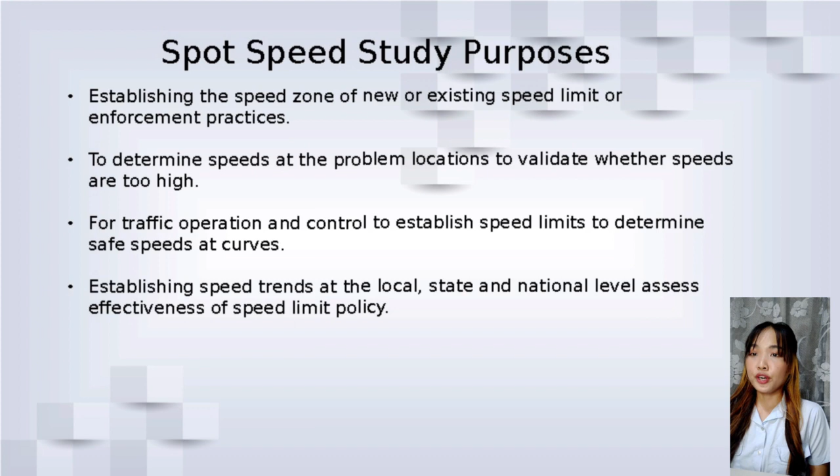Establishing speed trends at local, state, and national level to assess effectiveness of speed limit policy. It is an important transportation consideration because it relates to safety, time, comfort, convenience, and economics. Kaalaman natin sa speed kapag tayo ay bumabyahe ay importante dahil dito natin nako-consider yung kaligtasan at yung oras natin kapag tayo ay aalis. Spot speed studies are used to determine the speed distribution of a stream at a specific location.

Used to describe the quality of journey and the performance of the road network in accommodating traffic demand. Dito sa spot speed study, nalalaman natin kung ang speed ay nadidistribute sa tama sa pag-agos ng traffic sa highway. Kung na-observe din natin ang speed, nade-determine ang roadway kung kailangan ng mga reconstruction, realignment, at bagong batas sa enforcement.

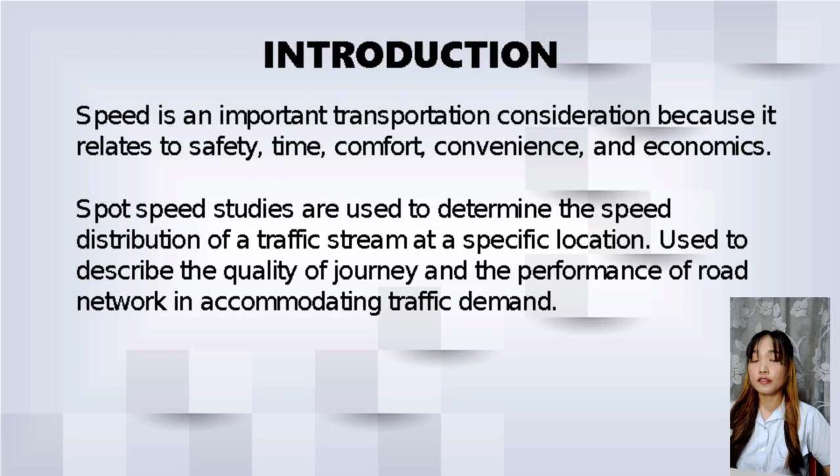Alam natin kapag Monday, sobrang traffic pagpapasok natin sa trabaho o school. At kapag Friday, peak period ito ng maraming sasakyan na nag-uuwian. Kaya dapat daw i-conduct ang spot speed study tuwing Tuesday, Wednesday, at Thursday, dahil ang kailangan lang na sample size ay at least 50 to 100 vehicles.

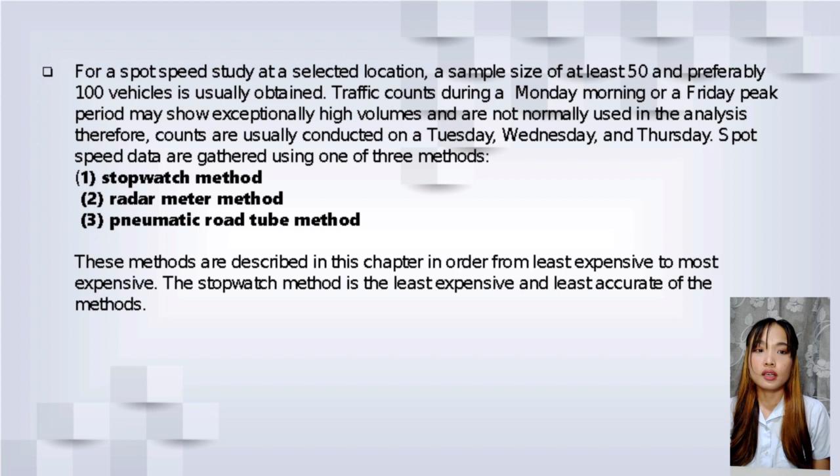Sa spot speed data, nag-gather tayo gamit ang 3 methods. Ang stopwatch method daw yung pinakamura pero least accurate na method.

Speed percentiles and how to use them. Most important to understand are the 50th and 85th percentiles. The 50th percentile is the median speed of the observed dataset. This percentile represents the speed at which half of the observed vehicles are below and half of the observed vehicles are above. The 50th percentile of speed represents the average speed of the traffic stream.

The 85th percentile is the speed at which 85% of the observed vehicles are traveling at or below. This percentile is used in evaluating and recommending posted speed limits based on the assumption that 85% of the drivers are traveling at a speed they perceive to be safe. In other words, the 85th percentile of speed is normally assumed to be the highest safe speed for a roadway section.

Weather condition may affect speed percentiles. For example, observed speeds may be slower in a rainy or snowy condition.

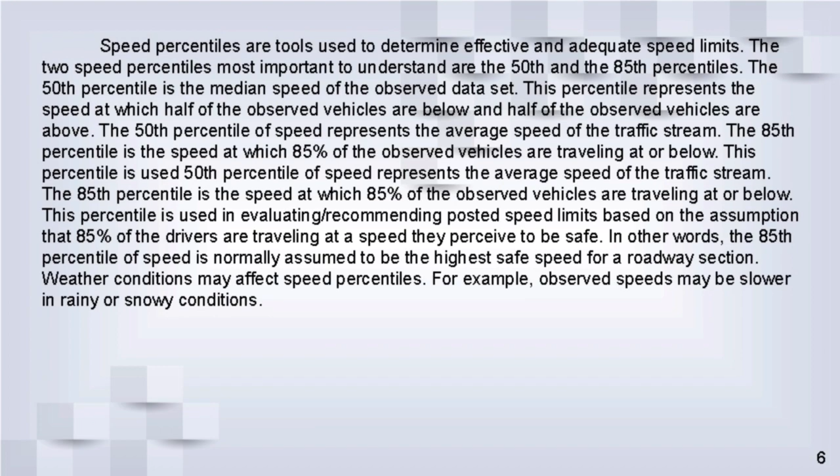Frequency distribution table - dito natin masosolve ang speed percentile. Ang frequency of vehicle sa column 2 ay yung mga number ng sasakyan na recorded, then ang bilis nito in miles per hour sa column 1. Ang cumulative frequency naman sa column 3 ay yung pag-add together row by row ng frequency of vehicle. At lastly, dun sa fourth column is a running percentage of the cumulative frequency.

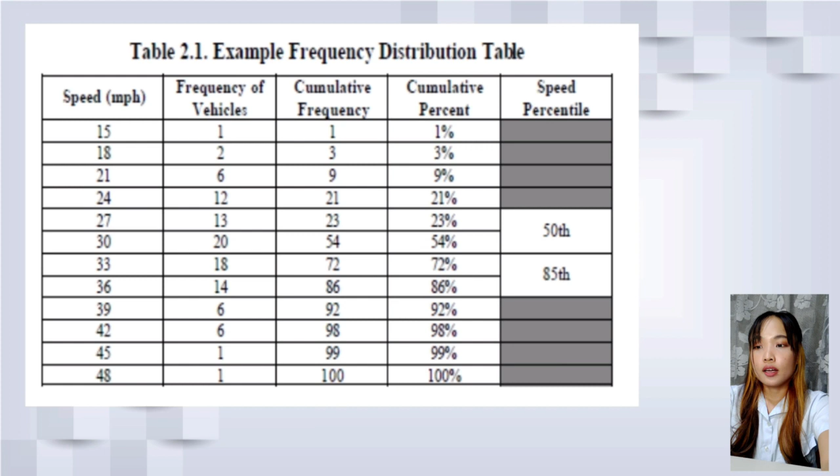Calculating speed percentile: SD is equal to PD minus Pmin divided by Pmax minus Pmin, multiplied by Smax minus Smin, plus Smin. SD is equal to speed at PD percentile desired. Pmax is the higher cumulative percent, Pmin is the lower cumulative percent, Smax is the higher speed, and Smin is the lower speed. So for calculating speed percentile, speed is equal to percentile desired minus lower cumulative percent, divided by higher cumulative percent minus lower cumulative percent, multiplied by higher speed minus lower speed, plus lower speed.

For percentile, gagamitin natin ang frequency distribution table. Ang 50th percentile speed is equal to 50%. Nag-fall siya between 27 and 30 miles per hour. So ang higher speed is equal to 30 miles per hour, and lower cumulative percent is equal to 23%.

Therefore, to find speed at percentile desired na equal sa 50%: 50% minus 23%, divided by 54% minus 23%, multiplied by 30 miles per hour minus 27 miles per hour, plus 27 miles per hour. It is equal to 29.6 miles per hour.

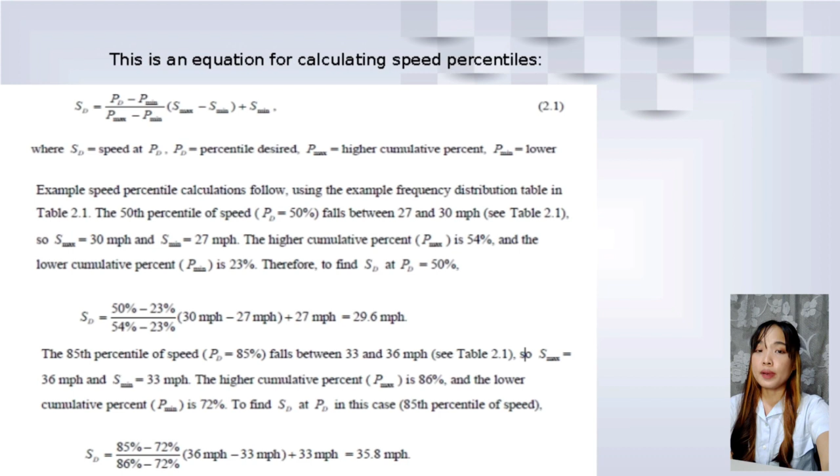To find the speed at the desired percentile, in this case, speed is equal to 85% minus 72% divided by 86% minus 72%, multiplied by 36 miles per hour minus 33 miles per hour, plus 33 miles per hour. It is equal to 35.8 miles per hour.

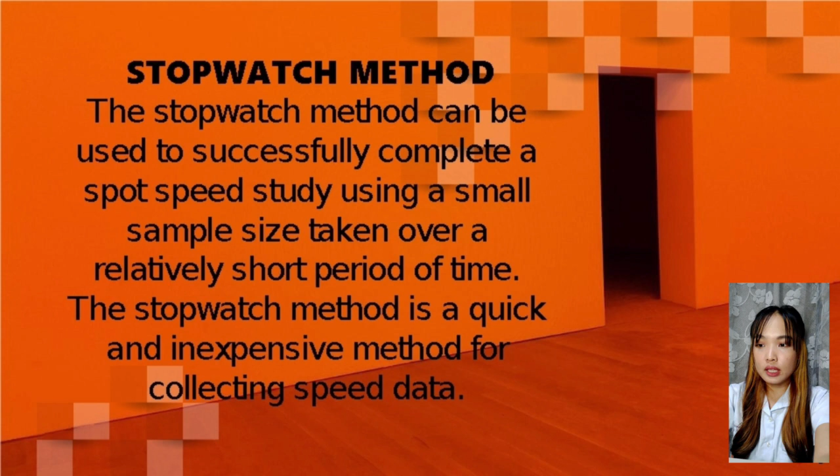Steps to a stopwatch spot speed study: first is obtaining the appropriate study length. Number 2, select proper location and layout. 3, record observations on stopwatch spot speed study data form. 4, calculate vehicle speeds. 5, generate frequency distribution table and determine speed percentiles.

There are also spot speed study steps that we need to follow. First is organizing the study plan. 2, select data collection method. 3, select appropriate site and collect field data. 4, reduce and analyze data. 5, interpret and report findings.

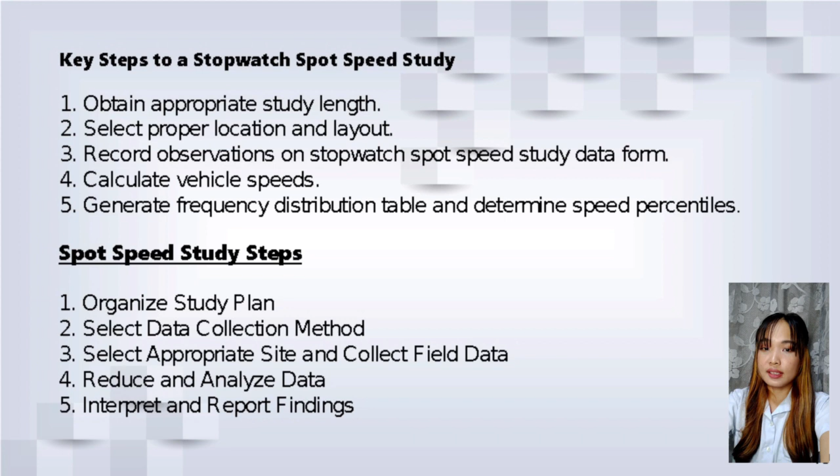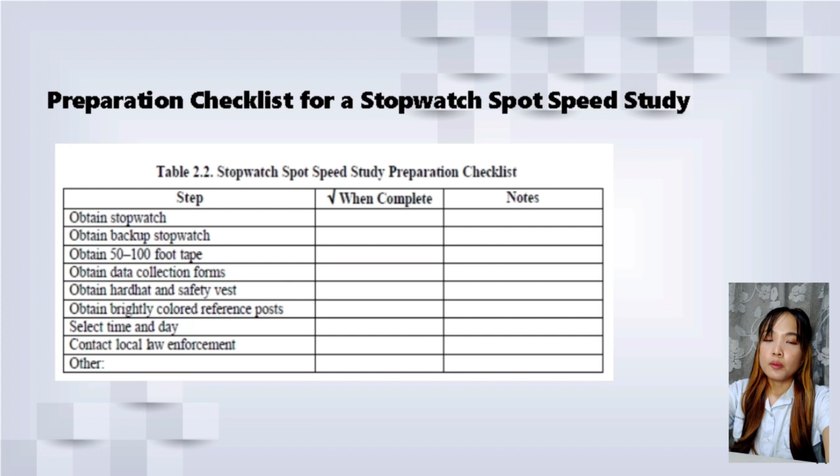For the spot speed study, we need a stopwatch and checklist. This is an example of a checklist with steps to follow: first is obtaining a stopwatch, backup stopwatch, obtaining 50 to 100 foot tape, obtaining a data collection form, obtaining hard hat and safety vest, obtaining a brightly colored reference post, selecting time and day, and contacting law enforcement.

In obtaining the appropriate study length, the study length is important because it is used in the calculation of vehicle speeds. Table 2.3 provides recommended study lengths which are based on the average speed of the traffic stream. Using this recommended study length makes speed calculation straightforward and less confusing. If these lengths are not appropriate, another length can be used, assuming it is long enough for reliable observer reaction time.

We need to know the study length to calculate the speed of the vehicle. In the table, this is based on the average speed of the traffic flow. Traffic stream average speed, recommended study length in feet: below 25 miles per hour, it is calculated at 88 feet. 25 to 40 miles per hour, 176 feet. Above 40 miles per hour, 264 feet.

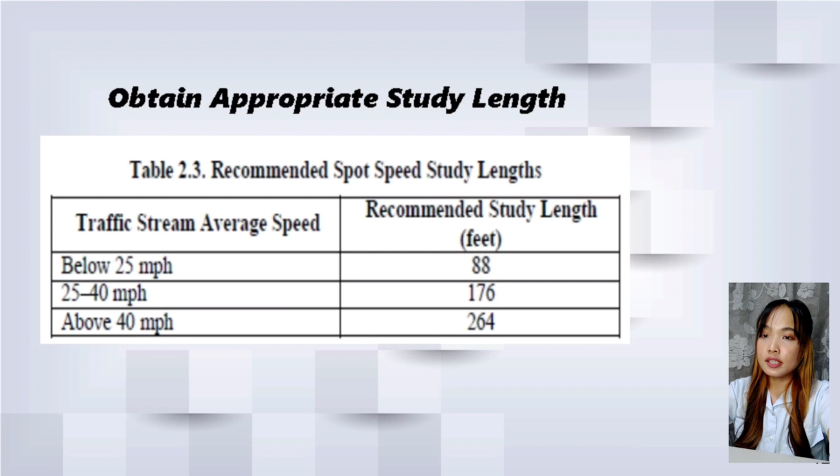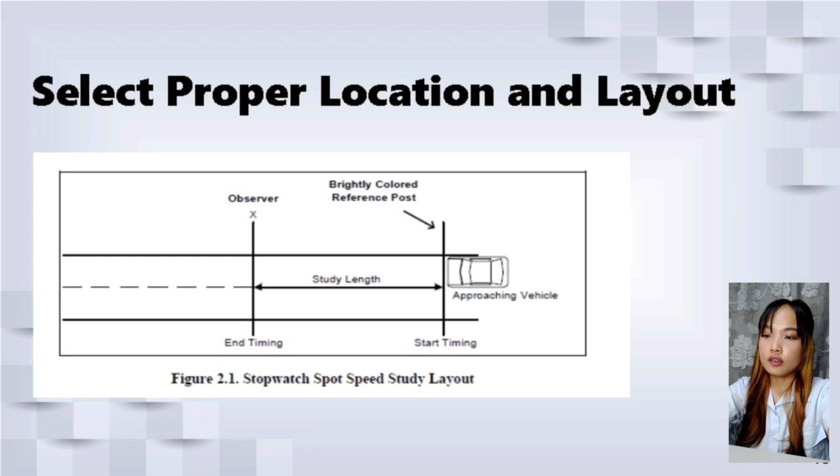Proper location, Figure 2.1: in selecting the proper location and layout, the observer must clearly see any vertical reference post. The observer should also be positioned near a bridge, or on the roadway back slope. The time starts at the brightly colored reference post and ends at the tree or signpost along the observer's sightline.

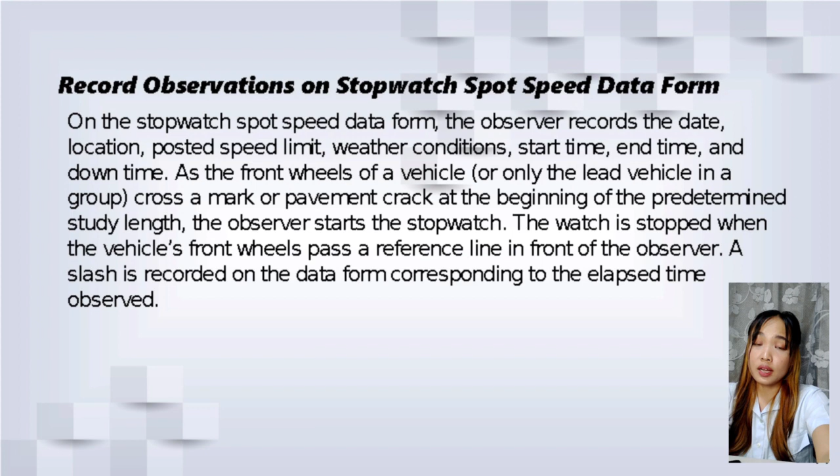Let's calculate the vehicle speed. Use the predetermined study length and the elapsed time it took the vehicle to move through the course, as recorded in the stopwatch data form. The formula is V equals D divided by 1.47 T, where V is the spot speed in miles per hour, D is the length measured in feet, and T is the elapsed time in seconds. In the equation, 1.47 is a constant that converts units of feet per second into miles per hour.

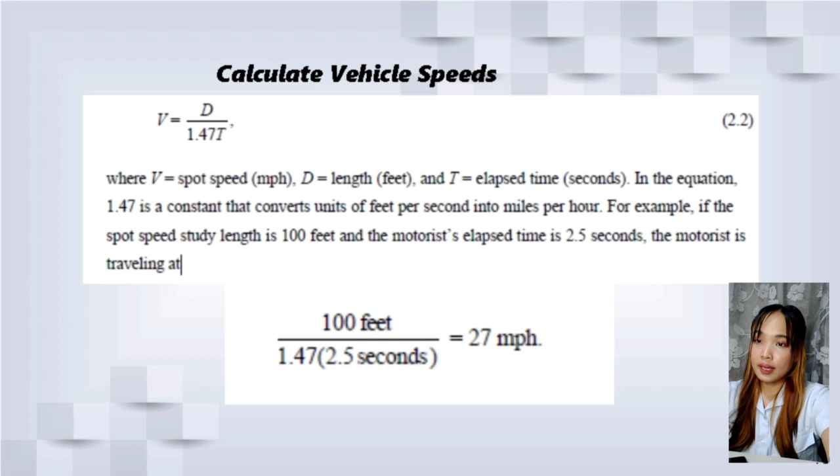For example, if the spot speed study length is 100 feet and the motorist's elapsed time is 2.5 seconds, the motorist is traveling at 100 feet divided by 1.47 multiplied by 2.5 seconds, which is equal to 27 miles per hour. Stopwatch spot speed data form.

The city of Cottonwood Glen received a complaint of afternoon traffic speeding in a residential area. The city suspected this was related to students leaving a nearby high school. The first action taken by the city was to quantify the facts by conducting a spot speed study. The city decided to use the stopwatch method because of their limited resources.

A location was selected near the intersection of 4th Street and University Avenue, approximately 2 blocks from the high school, and where the city had received multiple speeding complaints from residents. The posted speed limit is 30 miles per hour. The study was conducted on a Wednesday and started at 3 p.m. The time was selected to correspond to the period when most high school students leave the school.

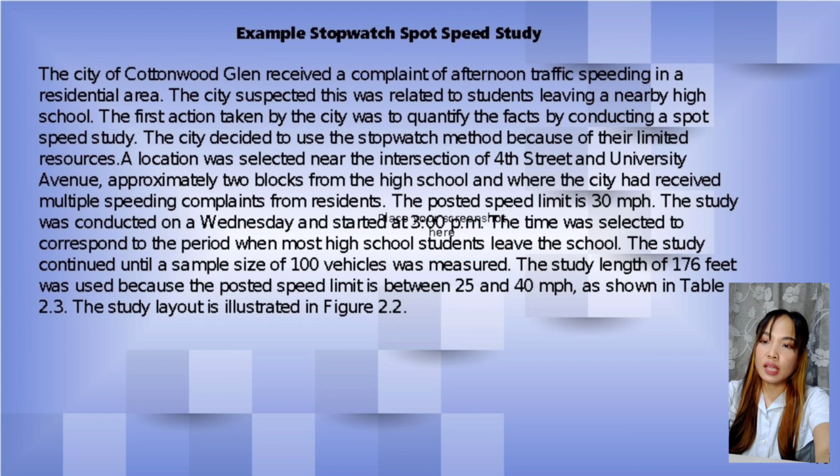The study continued until a sample size of 100 vehicles was measured. The study length of 176 feet was used because the posted speed limit is between 25 and 40 miles per hour, as shown in the table. The study layout is illustrated in figure 2.2.

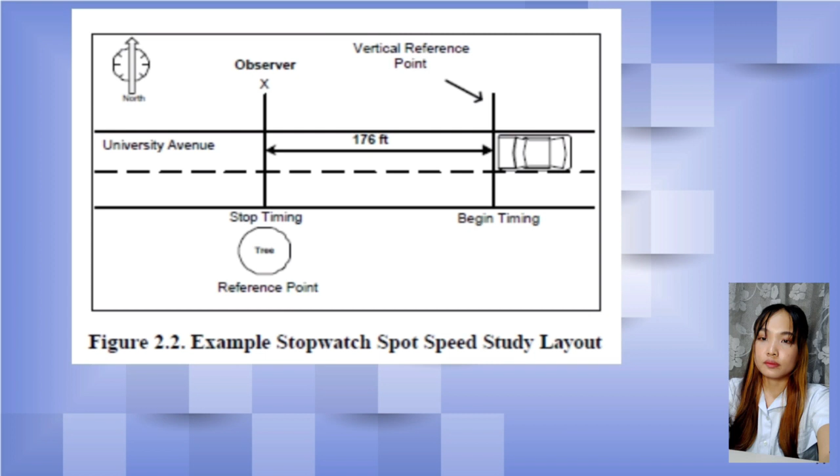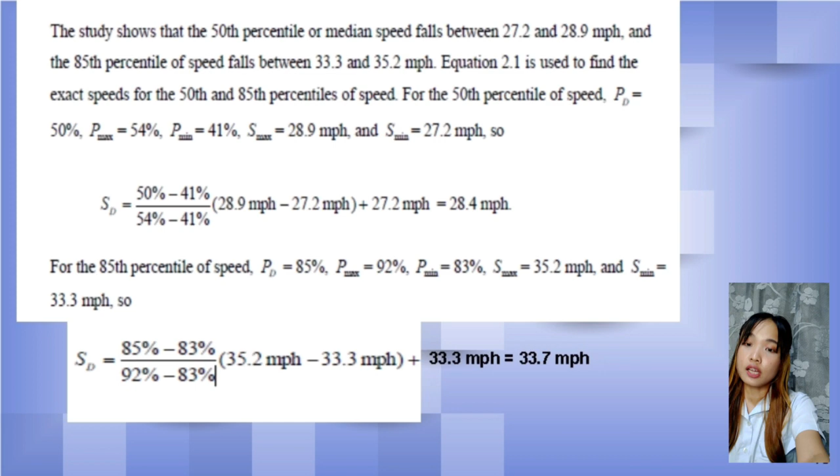For the 85th percentile speed, the given values are: speed is 85%, higher cumulative percent is 92%, lower cumulative percent is 83%, higher speed is 35.2 miles per hour, and lower speed is 33.3 miles per hour. The solution is: speed equals 85% minus 83% divided by 92% minus 83%, multiplied by 35.2 miles per hour minus 33.3 miles per hour, plus 33.3 miles per hour. The final answer is 33.7 miles per hour.

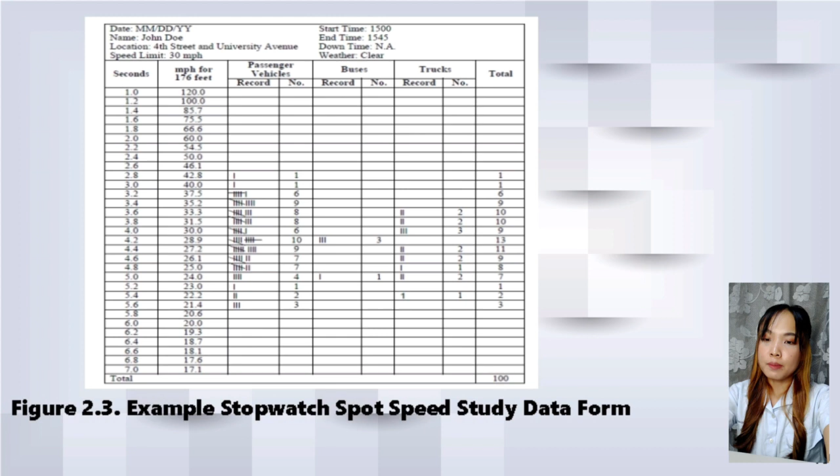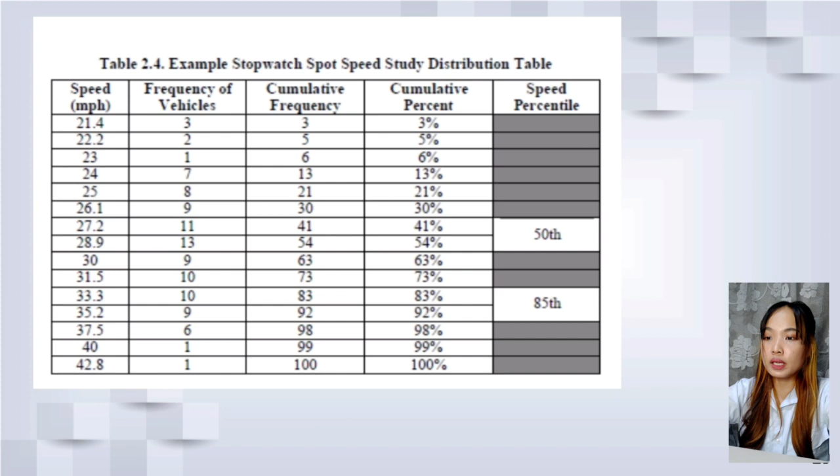This is sometimes used to determine whether the 85th percentile speed is too high compared to the speed limit. If the 85th percentile is 5 miles per hour above the posted speed limit, it needs to be evaluated. In this case, the 85th percentile speed is equal to 3.7 miles per hour above the speed limit, so this is not an issue.

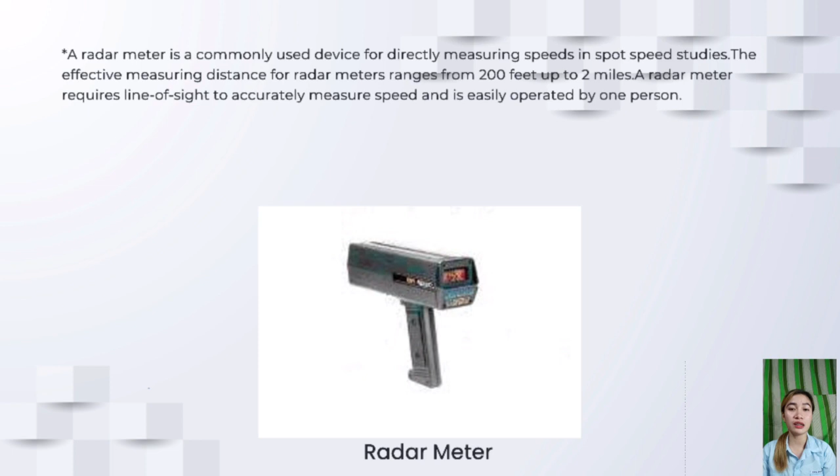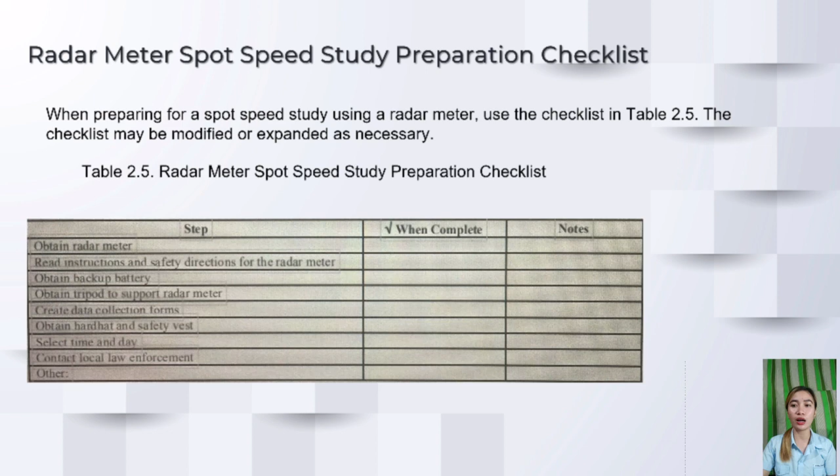Key steps to a radar meter spot speed study. A radar meter spot speed study includes 4 key steps: 1. Select proper location and placement of radar meter. 2. Determine an appropriate selection strategy. 3. Record observations on radar meter spot speed study data form. 4. Generate frequency distribution table and determine speed percentiles.

Select proper location and placement of radar meter. The positioning of the radar unit is determined by the capabilities of the radar unit. The unit should also be concealed from the view of motorists. The effective range may be up to 2 miles, while increasing distance decreases effectiveness. The least accurate position, which often results in no readings at all, occurs when the meter is aimed at a 90-degree angle to the roadway center line.

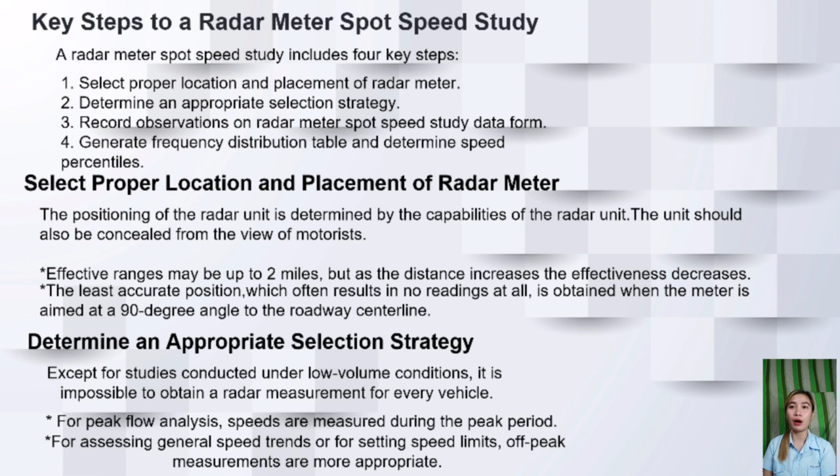For peak flow analysis, speeds are measured during the peak period. For assessing general speed trend or setting speed limits, measurements during off-peak periods are more appropriate.

The selection of the target vehicle that represents the vehicle population under study is also important. The question is, what type or types of vehicle are of concern? Cars, trucks, buses, or others?

Typically, cars, station wagons, pick-ups, and panel trucks, and motorcycles are classified as passenger cars. Other trucks, buses, and farm equipment may be recorded separately.

When the target vehicle is defined, a selection strategy is developed to provide a random sample. A random sample reduces the tendency to select vehicles that stand out. For example, the observer could obtain a speed reading from every 4th vehicle or every 10th vehicle.

Record observations on the radar meter spot speed data form. On this form, the observer records the date, location, posted speed limit, weather conditions, start time, end time, and downtime.

A slash is recorded on the data form corresponding to the speed observed for each selected vehicle, or only the lead vehicle in a group, under the appropriate vehicle type classification.

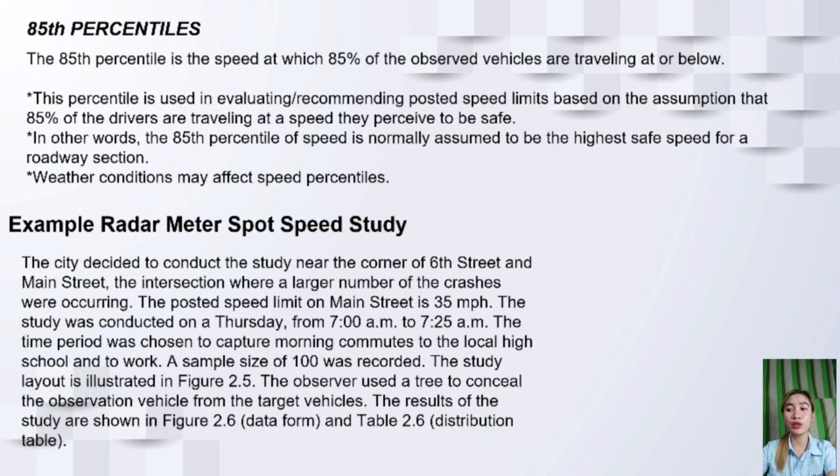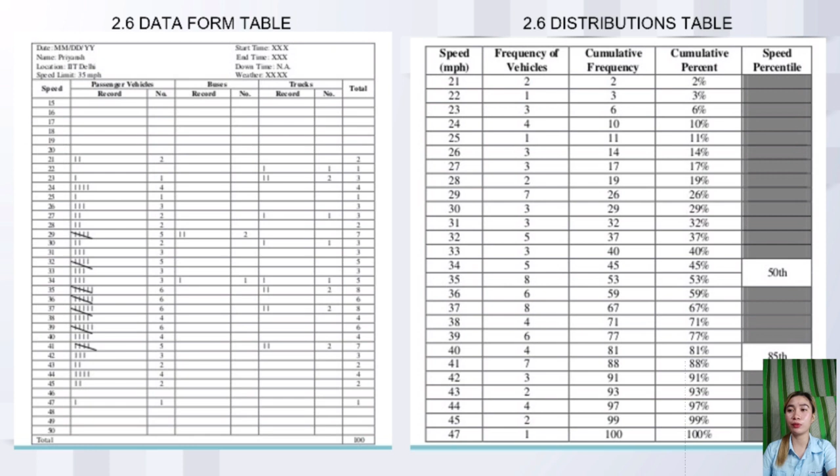The study shows the 50th percentile or median speed was between 34 and 35 mph, and the 85th percentile of speed was between 40 and 41 mph.

Equation 2.1 is used to find the exact speeds for the 50th and 85th percentiles. For the 50th percentile, P sub D equals 50%, P sub max equals 53%, P sub min equals 45%, S sub max equals 35 mph, and S sub min equals 34 mph. S sub D equals 50% minus 45% over 53% minus 45%, times 35 mph minus 34 mph, plus 34 mph, equals 34.6 mph.

For the 85th percentile of speed, P sub D equals 85%, P sub max equals 88%, P sub min equals 81%, S sub max equals 41 mph, and S sub min equals 40 mph.

So, S sub D is equal to 85% minus 81% all over 88% minus 81%, times 41 mph minus 40 mph, plus 40 mph, which is equal to 40.6 mph.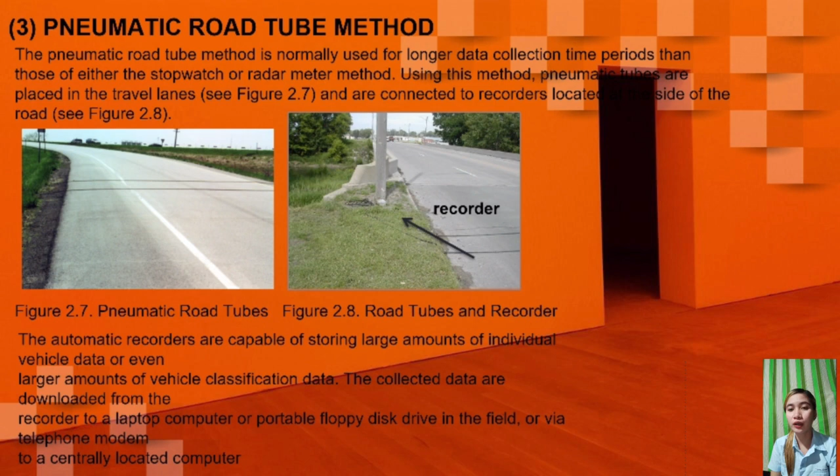The automatic recorders are capable of storing large amounts of individual vehicle data, or even larger amounts of vehicle classification data. The collected data are downloaded from the recorder to a laptop computer or portable floppy disk drive in the field, or via telephone modem to a centrally located computer.

Key steps to a pneumatic road tube spot speed study. A pneumatic road tube spot speed study includes 4 key steps: 1. Perform necessary office preparation. 2. Deploy and calibrate data collection equipment. 3. Check data and retrieve equipment. 4. Generate a frequency distribution table and determine speed percentiles.